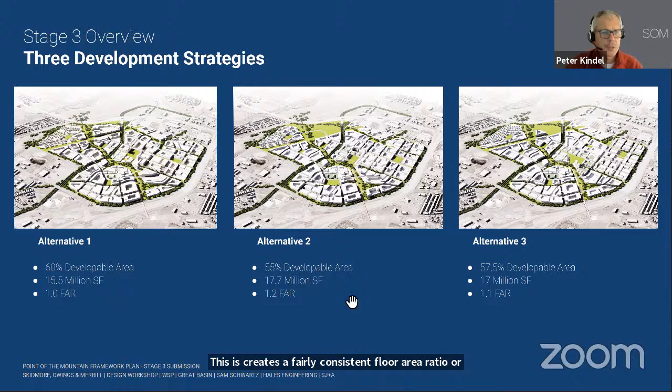The main driver of that difference is the community park we talked about in the Northwest. They are all relatively similar in terms of total square footage. Alternative 1 has 15.5 million, alternatives 3 and 2 have 17 million. This creates a fairly consistent floor area ratio, or FAR, meaning the perceived density of the project. But more importantly than the differences are actually the things common to all 3, so I wanted to walk you through those now.

One is this idea of uniquely Utah. We heard that from you last time. We want to make sure the project is specific to this place. We also want it to be an economic catalyst for the Wasatch Front. There was general agreement that this project should be a landmark project with higher density and higher level of aspiration than typical projects.

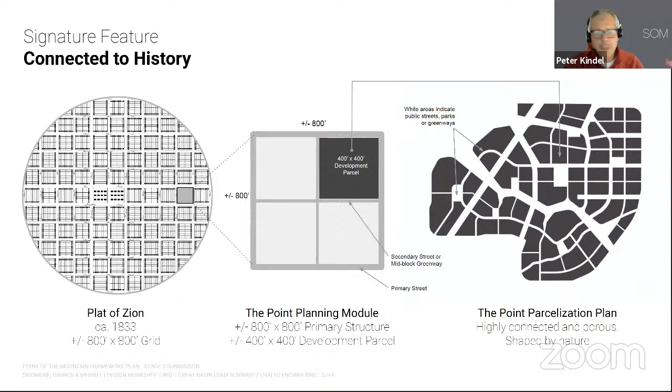There's also a comment about the road grid and why we chose the development increments or parcels that we did. It really was based on the original Salt Lake grid, shown here on the left, or at least the concept behind it, which formed an 800 by 800 foot macro structure, with the development parcels contained within that. So there's a correlation with this idea of being uniquely Utah, between the physical layout of the plan and Salt Lake history. We think that's important, and it also establishes porosity and movement through the project.

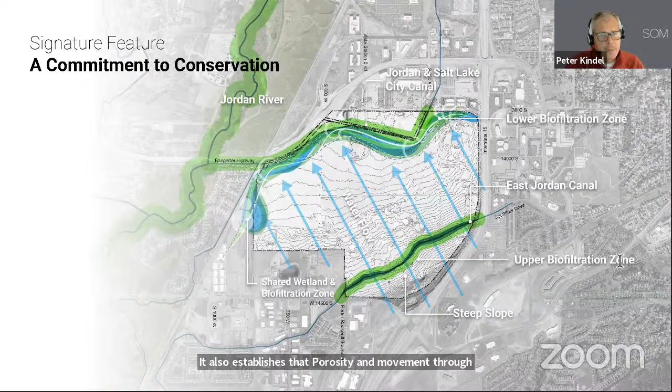A commitment to conservation, water management and incorporation of wetlands. Of course, the river to range trail, which we've talked about before, this idea of connecting these two major physical features in the valley, the river and the range.

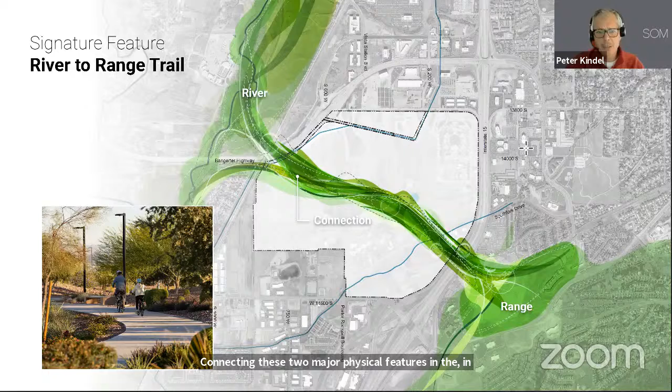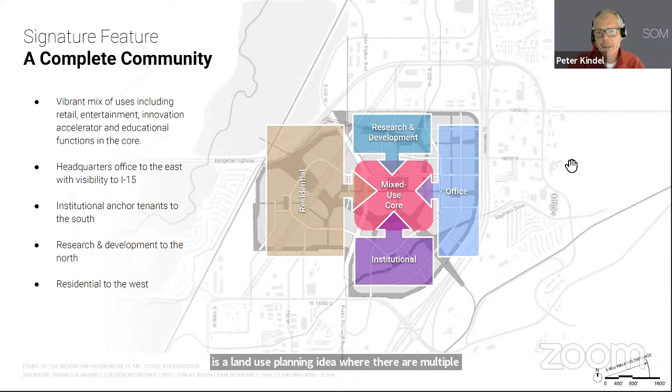What we're calling a complete community, which is a land use planning idea where multiple activities interact around a central core. That is structured around the notion of a 15-minute city, so everything is within a 15-minute walk of the center. At its core, this project innovates in the sense of being primarily a bike and pedestrian community, and cars become complementary to that idea.

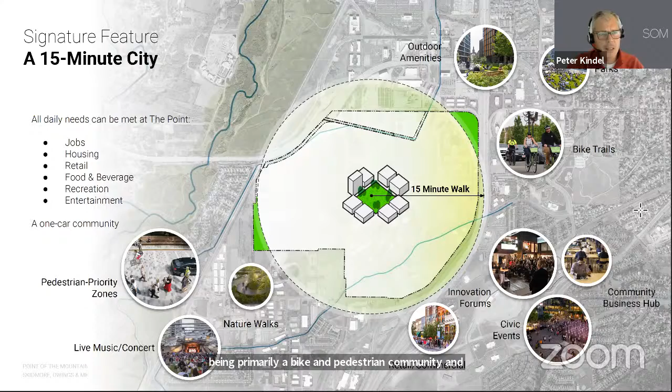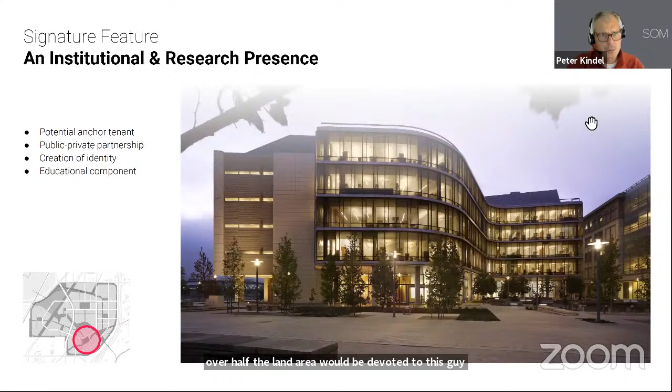A series of 5-minute districts. All of the schemes have this subdivision of districts, and then some program elements. This signature feature of a business and technology hub—over half the land area would be devoted to this commercial goal, an institutional and research presence, and a live-work community where there is a balance of housing and jobs in proportion to each other.

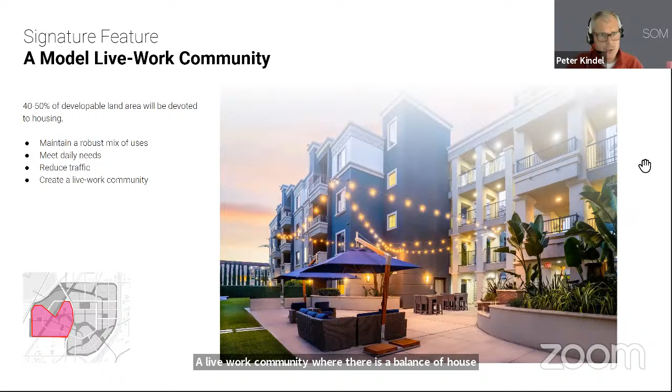Gold standard bus rapid transit. As I mentioned, we have been working with UTA to refine the BRT route to get that maximized around density and jobs. We've also been talking with UTA about a very innovative circulator in the plan.

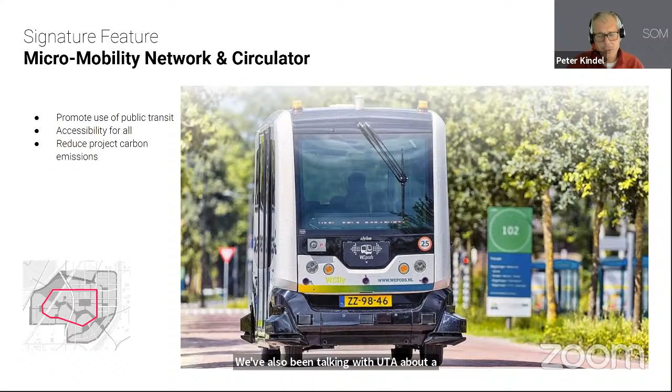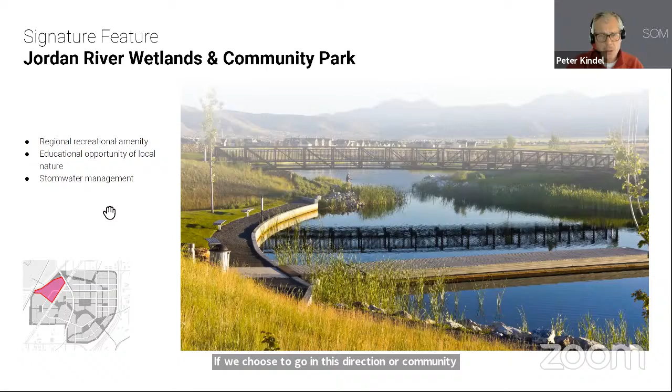Again, this is common to all the plans: a retail and entertainment destination, which would be part of the core area. If we choose to go in this direction, a community park at the northwest, a central park, which we've heard about before, and then pedestrian priority zones.

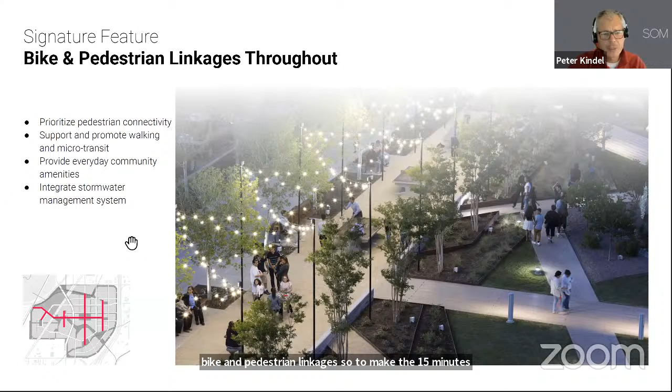Bike and pedestrian linkages. So to make the 15-minute city idea work, this idea of a complete community, strengthening and reinforcing these bike and pedestrian links.

And then finally, a community for everyone. So it's a place where families can live, where young people can get their first job, where communities can come and be part of a full and complete community, as exemplified by these smaller amenities and parks distributed through the project to add to that livability.

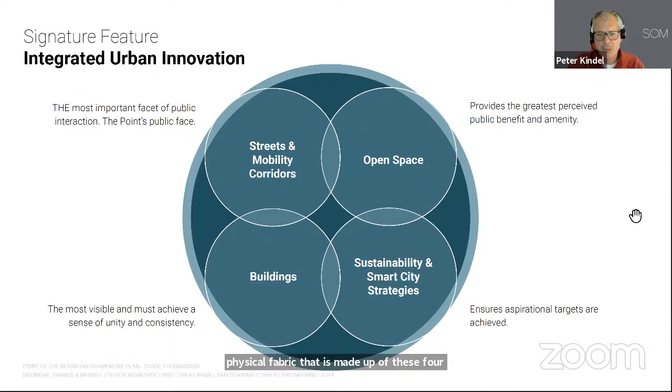And this will all come together in a highly innovative physical fabric made up of four components: streets and mobility corridors, open space, buildings, and our sustainability and smart city strategies. So those are the common elements.

Now I wanted to quickly walk you through the actual alternatives. This is alternative 1, with 60% developable area. Here's the framework plan you've seen before. The gray represents development area, the green is open space, and the white are roads. You can see the pink or dark red line is the BRT route.

We tried to bring that BRT route right into the core area, but in this particular option it actually skirts the edge of the core area. There would be two stations as shown by the white dots, and the dotted red line indicates a potential pedestrian priority zone. It's pretty substantial in this option, essentially defined by that loop road.

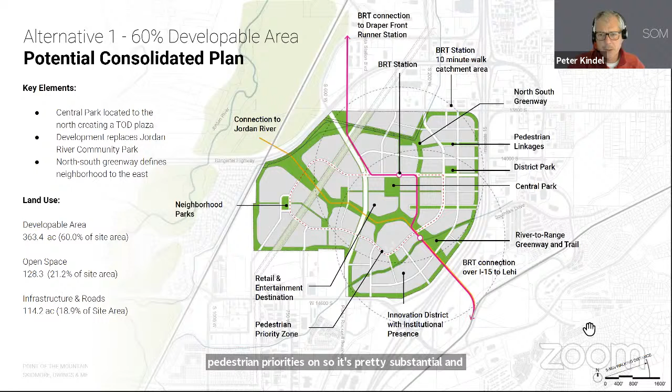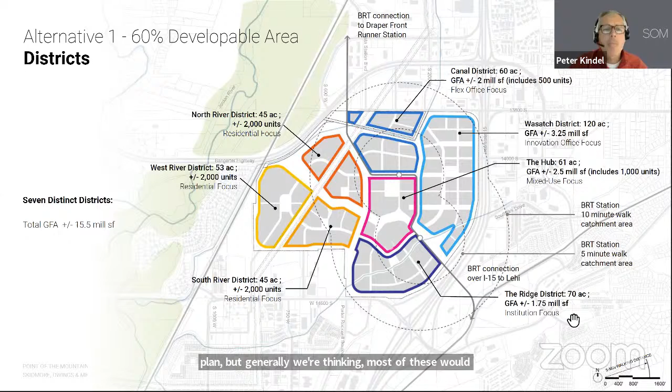The district concept is shown here. These districts range from 45 acres up to 120 acres. They would have different focuses depending on where they sit in the plan, but generally we're thinking most of these would be mixed use in some way. The retail and district cores are indicated here—you can see a concentration of retail and other active functions that would serve as a balance for the residential and office, focused around the BRT.

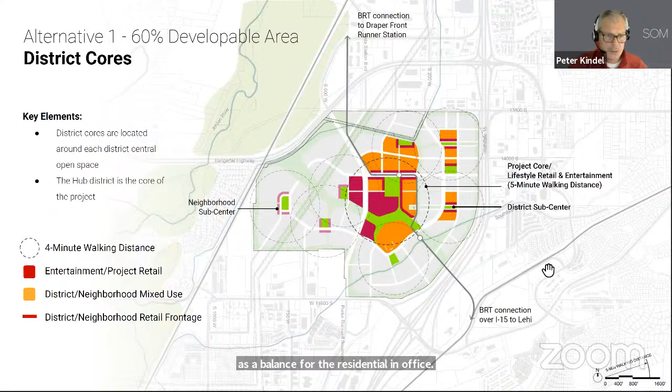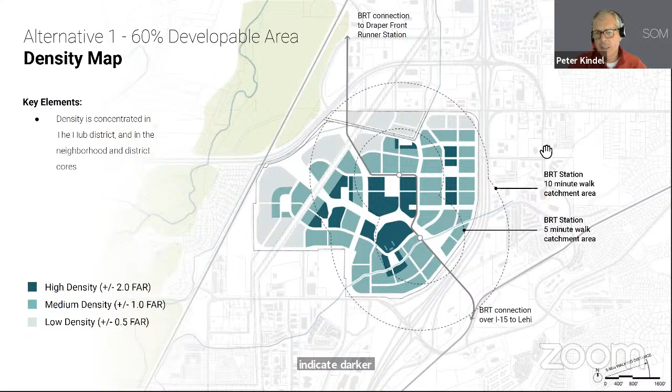So a high degree of accessibility from public transit to this core area. And then the density map shown here: darker colors indicate higher densities, again trying to maximize that density around BRT and public transit.

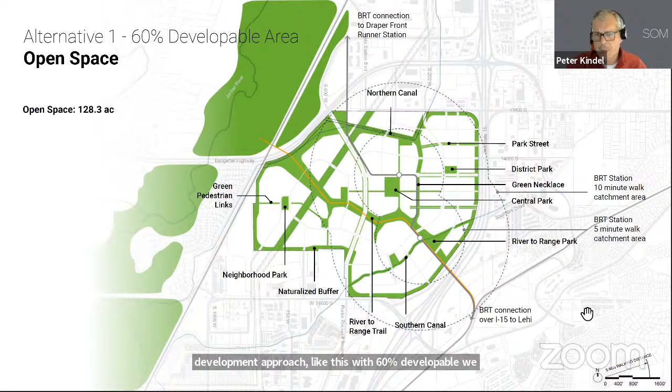The open space plan in option 1 indicates about 128 acres of open space. You can see the community park in the northwest is not included in this plan. What this means is if we move forward with a development approach like this with 60% developable, we would lose some of those sports fields, essentially, so people would have to go elsewhere to get that recreation component.

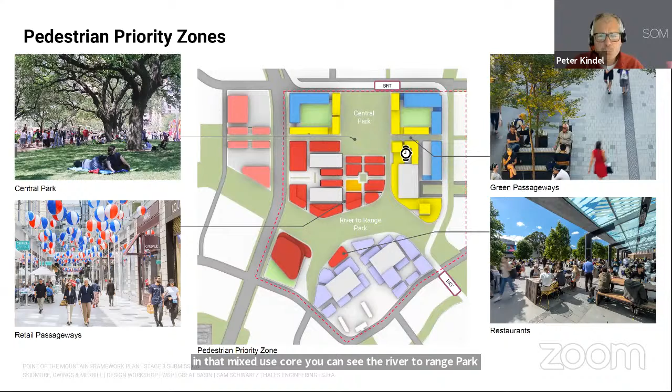As I mentioned, we've spent some time working on the core areas. This gives you a sense of the pedestrian priority zone in that mixed use core. You can see the River to Range Park and the Central Park. We're also looking at a variety of micromobility and transit options.

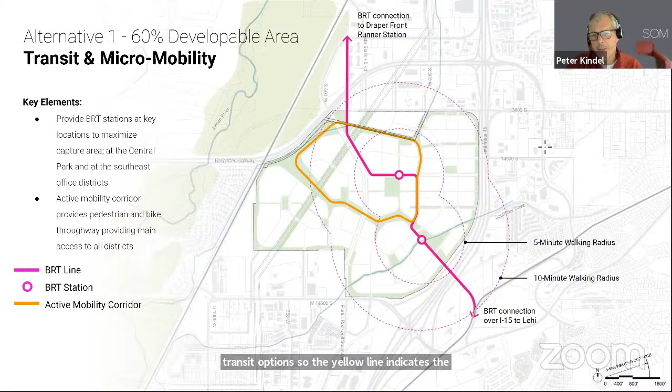The yellow line indicates a potential micromobility or circulator route. We're in discussions about whether that should be a separated route running in its own right-of-way, or whether it's integrated with streets. We hope to refine that in stage 4.

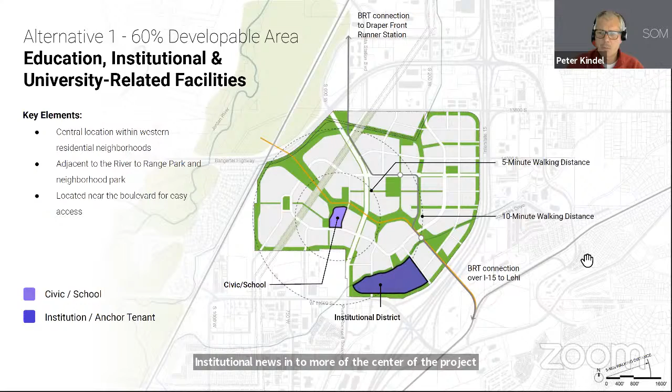This shows the civic and institutional presence in the plan. This is still very much in progress. As I mentioned, the developers encouraged us to move that institutional use into more of the center of the project, so it activates the adjacent land uses.

Alternative 2 is 55% developable. The difference is that community park is now back in the plan. I want to emphasize that we can still meet the development targets and GFA targets we've established, even with that park. The other difference is that the central park, at the center of the plan, has been joined up with the River to Range Trail, so that central park location changed a little bit.

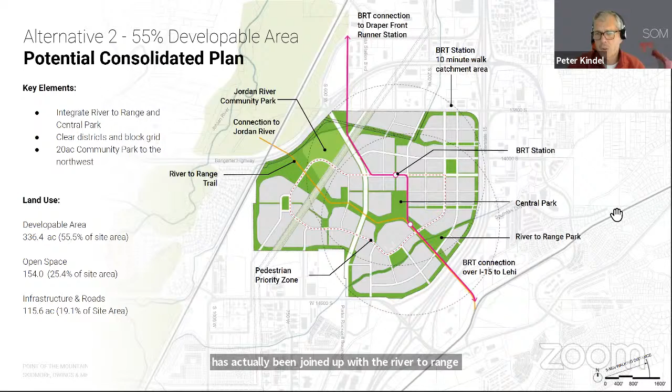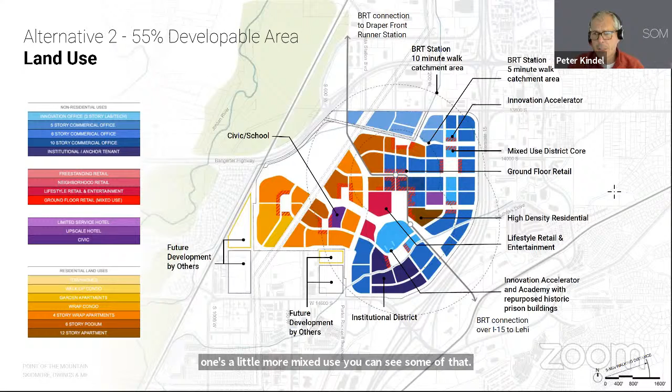I'll go a little faster. The basic concepts are similar between the 3 schemes. This one's a little more mixed use—you can see some of that residential migrating eastward into the office district. Based on developer feedback, we anticipate that will be a little bit more developed in stage 4.

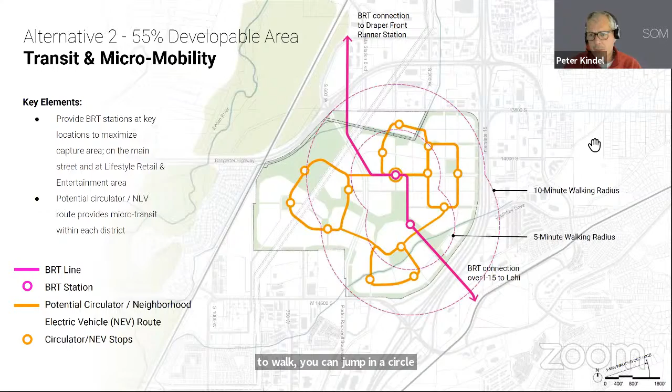Again, similar road network, but this one has a different transit idea. We're also exploring multiple smaller loops that connect to districts and link people back to the BRT stations, so for people who can't walk or choose not to, you can jump in a circulator and get to BRT or wherever you need to go in the plan.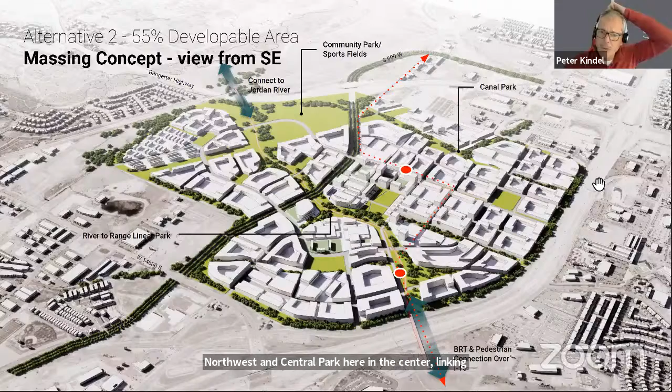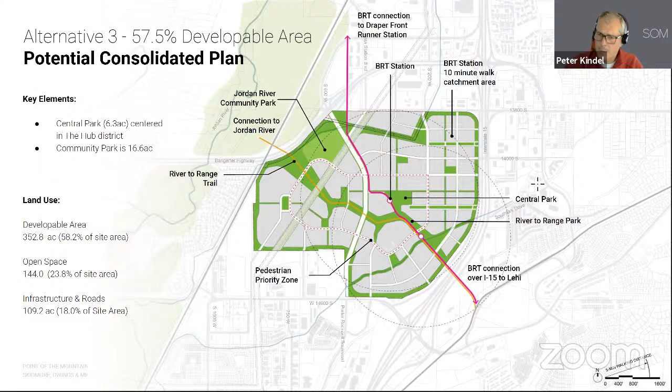But again, we can meet the development goals without any issue on all 3 options, so it's really a question of which is the preferred park system. This one also demonstrates a fairly high degree of mixing of uses, probably the most of all 3—you can see about 6 or 8 parcels in the core area converted to residential, which is in line with what the development community, and some of you, have asked for.

Again, the idea of a slightly more mixed use, dispersed retail model, but still a commitment to that core area with the core retail right there in the middle.

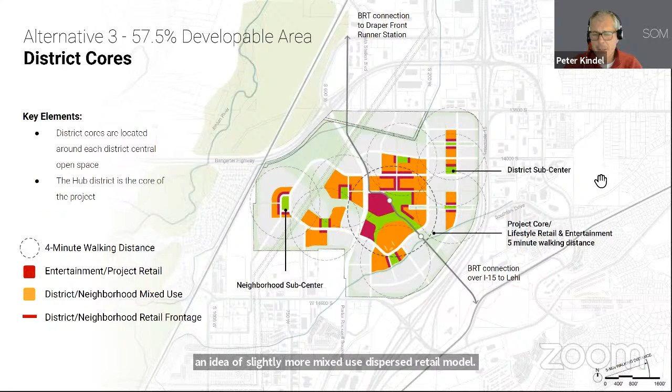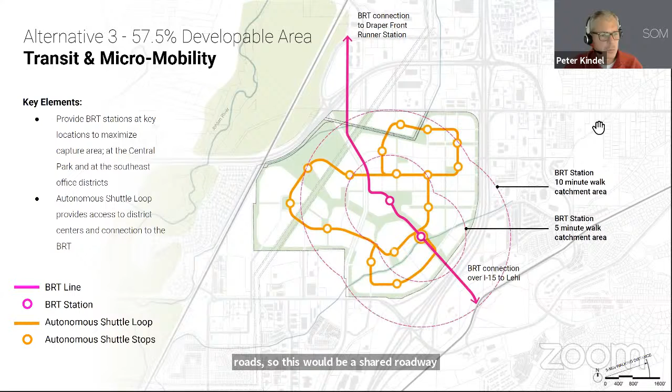In terms of transit and micromobility, again, a loop system would run on existing or planned roads. This would be a shared roadway idea where the mobility vehicle would run on a shared street.

And then I just wanted to touch on a few studies we did on the core area as well as the open space. I'll take about 5 more minutes, Alan, if you don't mind.

The open space planning has also been advanced in stage 3. This shows a diagram of the types of open space that we're thinking of. You can see the signature open space, of course, is the River to Range Park.

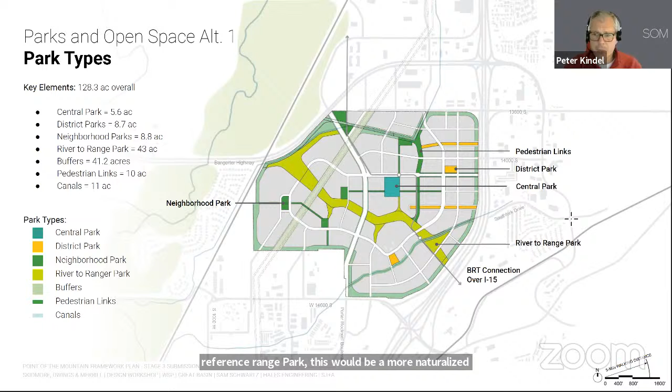This would be a more naturalized environment, but could also take certain programming. So you could have some informal soccer fields there, and other types of active recreational uses there.

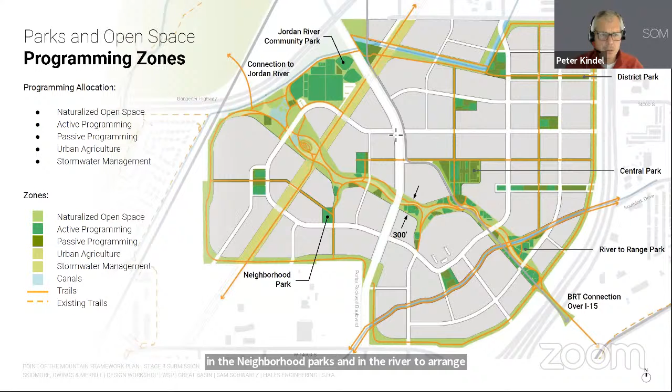This drawing shows in the brightest green color what we call active programming—sports fields, volleyball courts, basketball courts, baseball fields. You can see that predominantly that's focused in this community park to the northwest, but there's also room in the neighborhood parks and in the River to Range Park for certain activities like that. So we can accommodate many activities in these other spaces.

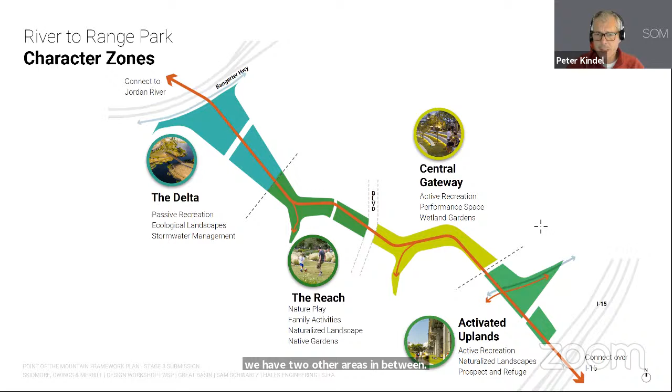In terms of the programming of the River to Range Park, we've divided it into 4 segments: the delta or low end towards the Jordan River, the activated uplands or high end towards I-15, and two other areas in between. Each of these can be programmed in different ways. I think that's what's really exciting about this park—it not only touches the entire project, but can serve many, many functions.

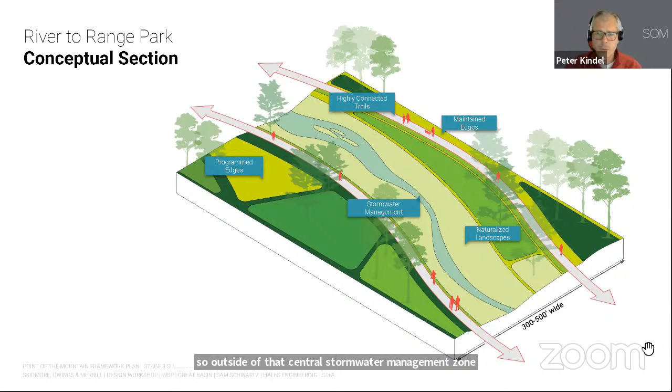One of those primary functions is to move and convey stormwater through the project. This will save money on below-grade infrastructure. It also creates potential for naturalized habitat recreation, but it also allows what we call programmed edges—so outside of that central stormwater management zone, there could be active spaces for children's play areas and events like that. We've begun to do some very informal programming of how this might work.

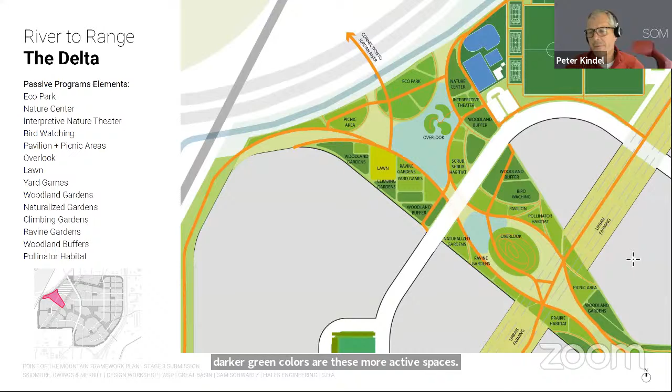You can see the orange lines are pathways, and the darker green colors are these more active spaces. This gives you a sense of the types of activities that could occur in there, and then just a few images of what things might look like.

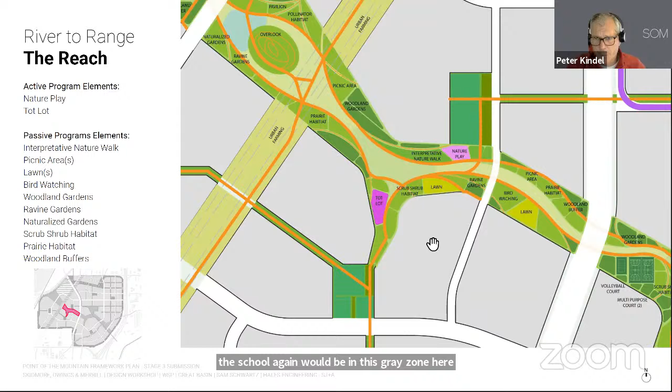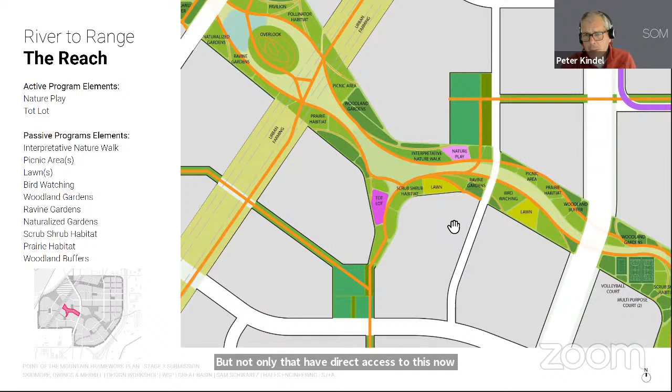As you move more to the center of the project, the school again would be in this gray zone here—that's the school parcel. You can see that kids could get right on these orange pathways and walk wherever they needed to go. But not only that, have direct access to this natural system and play areas that would be, I think, really complementary to that school function.

We want the landscape to reflect Utah, to reflect the ecosystems and plant communities that are native to this part of the valley. That'll be consistent throughout the whole park.

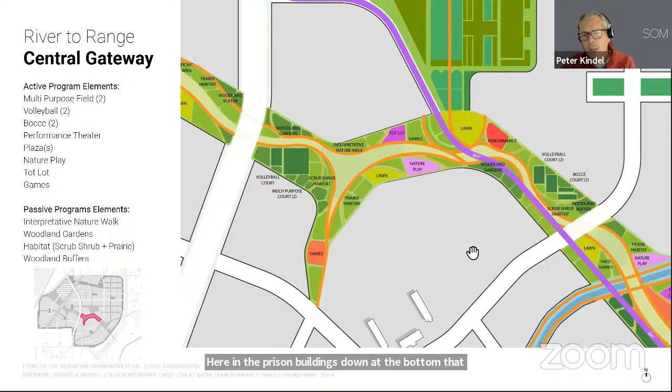As you move more to the middle, this is again that core area, that mixed use core. Here are the prison buildings down at the bottom, the 3 historic prison buildings. You can see some of the programming ideas in this central area.

And then finally at the top, adjacent to I-15, this could be a more programmed area, maybe a little less natural because of the proximity to the highway and some of those influences, but could be very well suited to maybe a more active program.

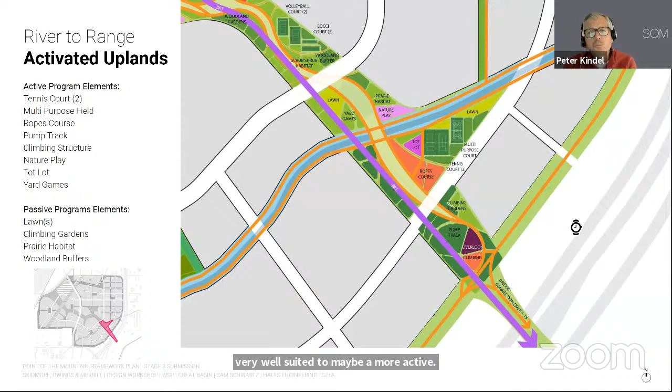So those are the 3 alternatives with a little bit of an overview to the open space. And Ellen, I'm happy to leave it there.

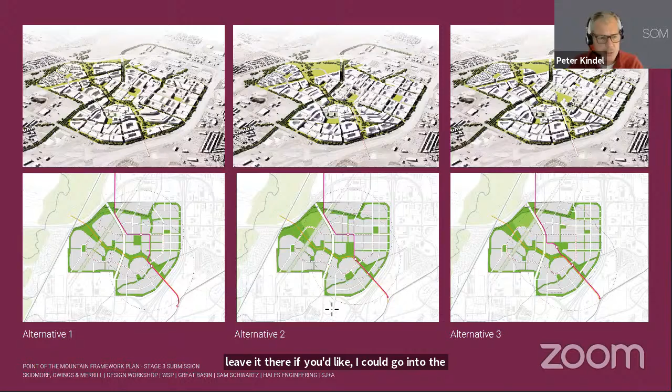If you'd like, I could go into the detailed planning for the core area if you'd like to spend another 5 minutes. Yeah, let's just touch on that quickly. Okay, Pete—yeah, I think it's, we want to get to discussion, but I think that's an important piece for people to understand. Right.

One of the really important parts of the project is the core area. This is not only the geographic center of the site, but the spiritual center of the project. This is the most mixed use, the highest density. It's where the River to Range Park meets the Central Park, and where the retail will be. Really important spot in the plan.

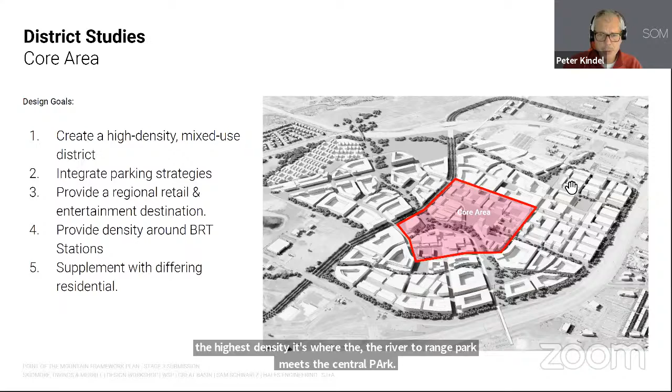So we've actually done three versions of this. The first one is a low density core. We tried to find an analog. This is Kierland Commons in Scottsdale, to give you a sense of the height of the buildings and the types of functions that might be here.

Probably most of you have been to a place like this. These are pretty active mixed use environments. Some of them have a high housing component, some of them don't, but they're great places to meet friends, with high energy activities that will serve all the uses in this master plan.

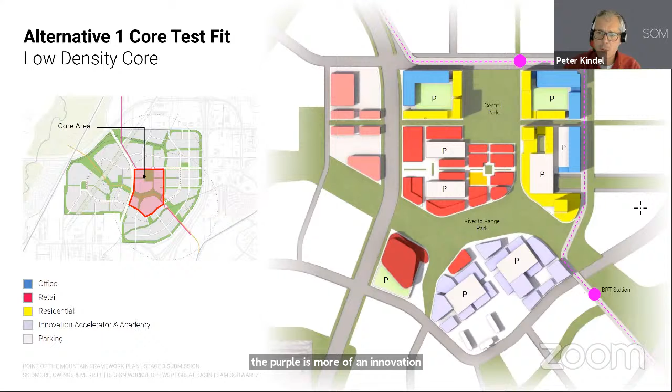So here you see an enlargement on the right of that core area. The main boulevard is this gray line that comes up the left side of this drawing. The BRT route is shown in the pink dotted line, with the two pink dots representing the stops. Yellow is residential, blue is office, and red is retail. The purple is more of an innovation R&D type function. So we see the core area being, again, highly mixed use.

This gives you a sense of the scale of the project. This is 72 acres, the parcels that are shown here. This is a 12-story building, this yellow one right here. So these are big development areas.

But I think what's really exciting is the mix of uses in this core area, the ability for it to accommodate a lot of exciting types of development, and the proximity of these different functions will really generate a lot of excitement and energy as part of the core of the project. This would be about 2.5 million square feet of development, which is shown here.

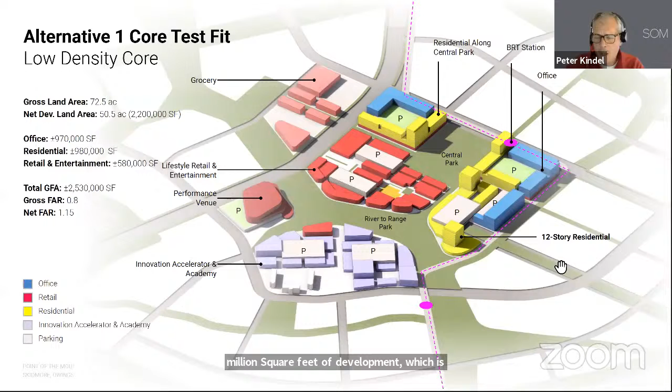We've also started some very early programming of the Central Park. These are just some very early ideas about what might be included in here, and some very simple ideas about how that might be arranged. But we want to have performance space, event lawns, some activities, some dining. You can see the BRT station at the north edge, and these green lines indicate pedestrian connections from different parts of the plan.

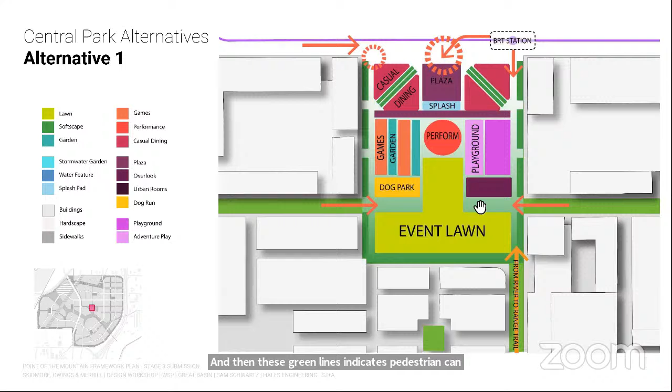Also exciting. And just as a reminder, for option one, alternative one, that Central Park is the furthest away from the River to Range. So it's actually its own distinct space, and that would touch the BRT line to the north.

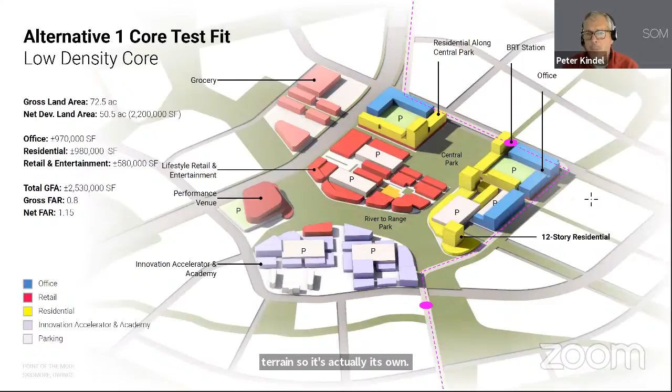Option two is what we called our high density core. The analog that we looked at is a place called Reston Town Center in Virginia. This has a very high, relatively high density, tall buildings.

Here is the plan, so this aligns with option two for the master plan. Here, the Central Park has been connected directly to the River to Range Park, so you can see that it's no longer linked to the BRT station. You would have to walk a little bit to get to that Central Park. However, there's potential benefits for being connected to River to Range for larger events, for instance, or other types of programming where there might be a lot of people.

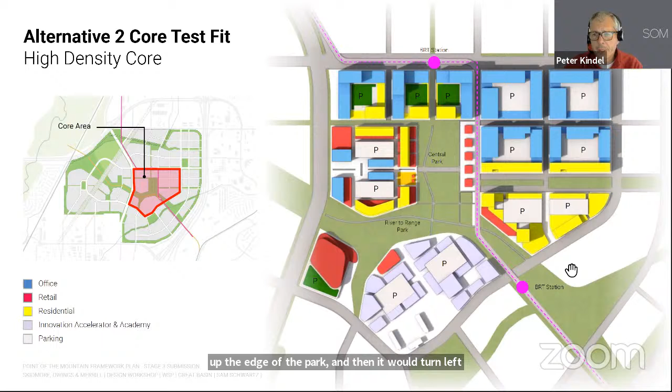So in this design option, the BRT comes in and would go up the edge of the park, and then it would turn left onto the boulevard and then exit to the north. But other than that, the land use assignments are approximately the same. Yellow represents residential, blue office, of course.

And here you can see more mixing, so you can see residential on top of red, which is retail, blue on top of red. So this is a more complex but very appropriate development model that a lot of folks are looking at today, this idea of mixing uses on a site. And you may be seeing some of this in the Salt Lake area today.

This is about 5.3 million square feet of GFA. Just for reference, that's almost a third of the total GFA of the project. So this high density model does accommodate and can absorb a lot of development. I think one of the components we're going to look at in stage four is to allow the core to respond to market demand, so the density may actually go up if the project really becomes successful.

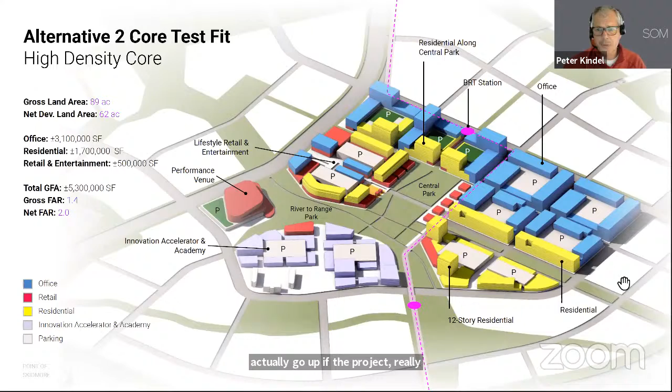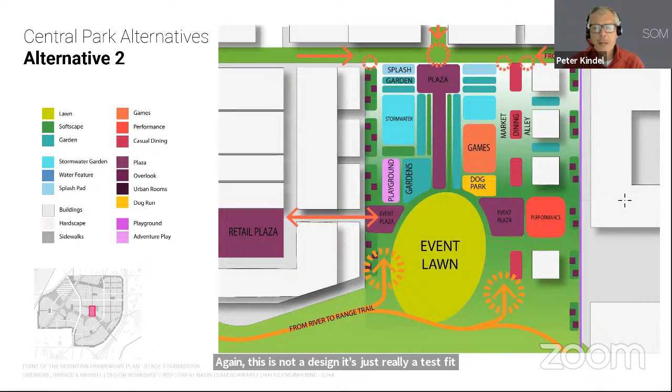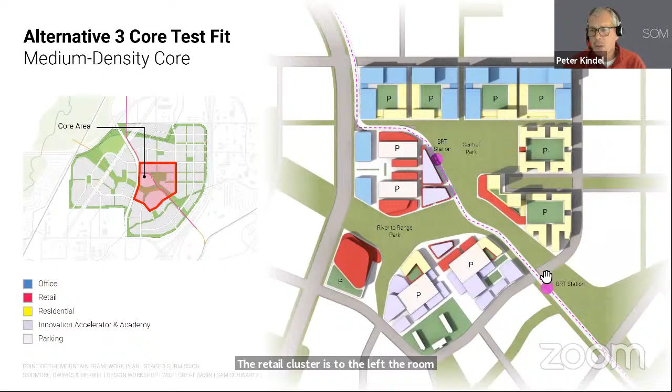In 3 dimensions, this is what that starts to look like. The BRT right-of-way is shown to the appropriate scale, about 40 feet wide. So one of the challenges would be how to make sure that the Central Park and River to Range Park are not overly impacted by that BRT route.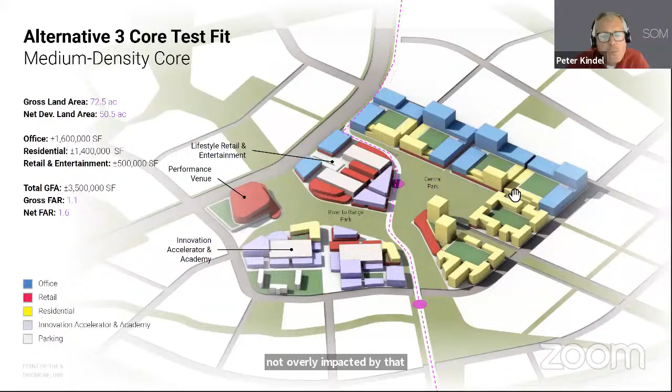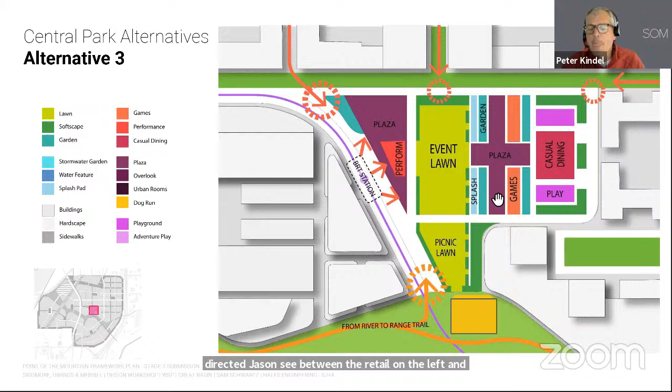This one's kind of interesting because we do have that direct adjacency between the retail on the left and the park on the right. This is probably the most unique layout of the three. So these are the three core areas.

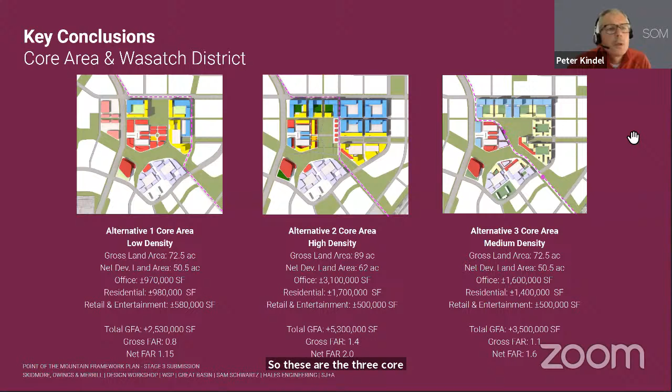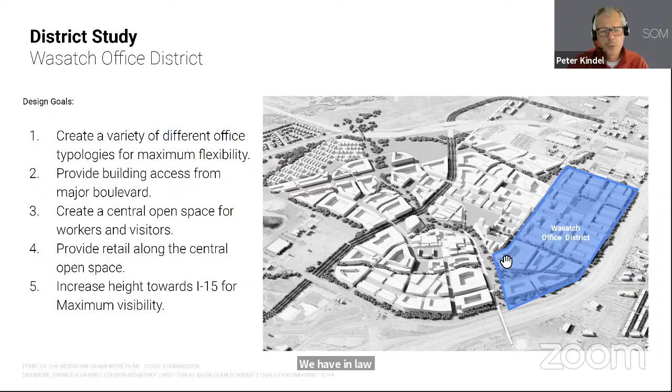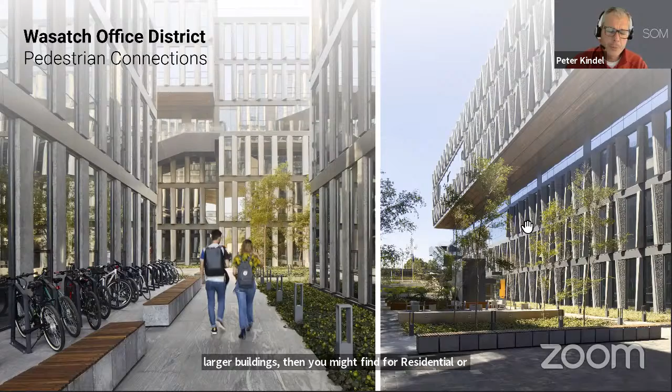One last test fit I wanted to share with you today. We are making sure that the office layouts we're showing in the framework plan actually work and accommodate real buildings and real parking structures. We've enlarged the grid a little bit in the office district because current demand for office warrants larger buildings than you might find for residential or retail areas. This gives you a sense of the scale and type of buildings that would go into these office environments.

We want a strong commitment to landscape, ground plane, and shared space, what we call active ground levels. This is the northeast quadrant of the plan. One of the challenges we had, in addition to building scale, was parking accommodation. According to current demand, the parking requirements are pretty substantial. You can see that buffer to I-15 that's part of the master plan. What we call Wasatch Park or Wasatch Square would be the central park for this area, the district park.

You may notice that we've clustered the parking structures so they are screened from the primary open spaces by buildings. So you don't see the parking structures as much as possible from the primary streets, and we can further screen those architecturally or with landscaping.

Here you see a three-dimensional model of that core area, the Wasatch Park and Wasatch Square. The smaller buildings would be research, R&D, special functions adjacent to the park. The larger blue buildings would be corporate office, and the Ps indicate parking.

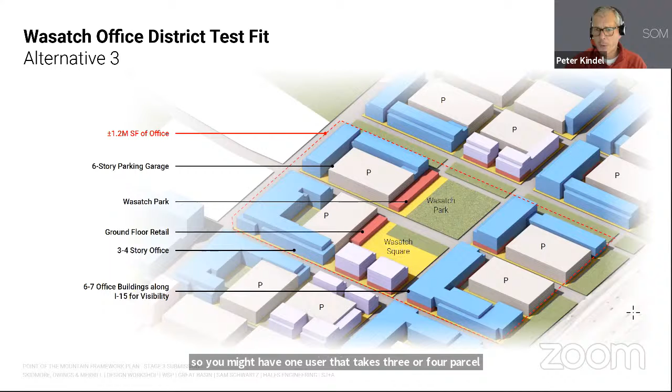The other challenge we wanted to look at was how do you aggregate parcels together. If a user comes in wanting, say, 1 million square feet of office, how would we do that? The red dotted line indicates about 1 million square feet. So you might have one user that takes 3 or 4 parcels, but we would require them to design the project in a way that's consistent with the principles you see here, this idea of public space, screening, parking.

Here's a view from a little further out. You can see the South BRT station to the left. A 5-minute walk is in the first dotted line, and a 10-minute walk is in the second dotted line. So even from the South BRT station, about 2/3 of this district would be within a 10-minute walk of BRT. That's fantastic.

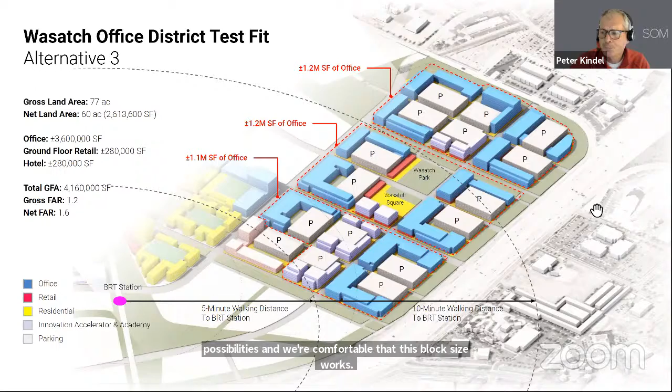We've indicated 3 potential campus groupings of buildings, each around 1 million square feet. So lots of possibilities, and we're comfortable that this block size works for this parcel. I think I'll leave it there, Ellen, and open it up to any questions.

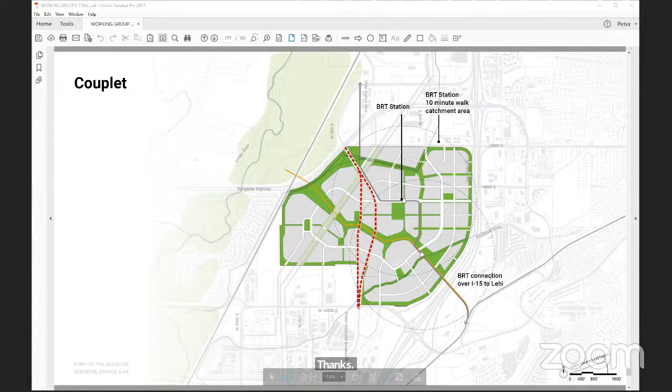So you've identified a number of things that are important and still very much under consideration. So thanks. Thank you. And Pete, did you want to add anything to that quickly, or did we cover it? Yeah, I think, Reed, thank you.

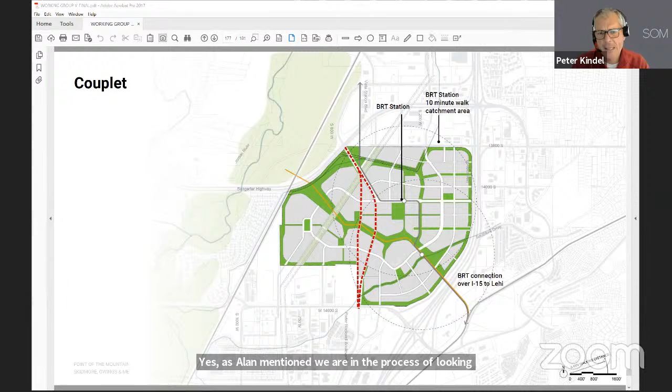Yes, as Alan mentioned, we are in the process of looking at the couplet. This was our first pass at it, and we have communicated some advantages and disadvantages of it to a client group, to Alan and Steve. So that is underway, and I think we'll be able to make a decision on it probably in the next couple of weeks. We're going to do a little more detailed design to really understand the impacts.

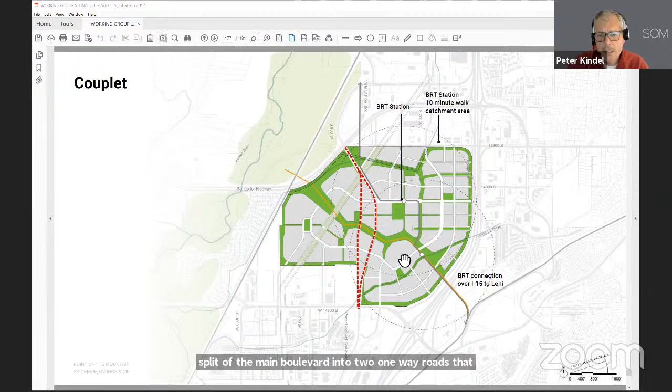And just for everyone's information, this represents a split of the main boulevard into two one-way roads that would be a little bit smaller in scale. And the idea there is to reduce the potential barrier that a larger boulevard may create between the two sides of the plan.

If I could just jump in, Reed, we were just looking at this yesterday and looking at analogs around the country, including at Daybreak, which has one of the better implementations of the couplet. So the main thing is to minimize the amount of inefficiency that's created by the taper. I think we'll probably be relooking at this geometry and seeing if we can get it more efficient, and see what the width needs to be between the two sides. But the whole idea is to break down the scale of the street so it's a little bit more pedestrian friendly.

I'd also add that we're working on this phase 1 programming right now, and we're definitely recommending single family detached, so higher density single family detached, but still detached nonetheless in the first phase.

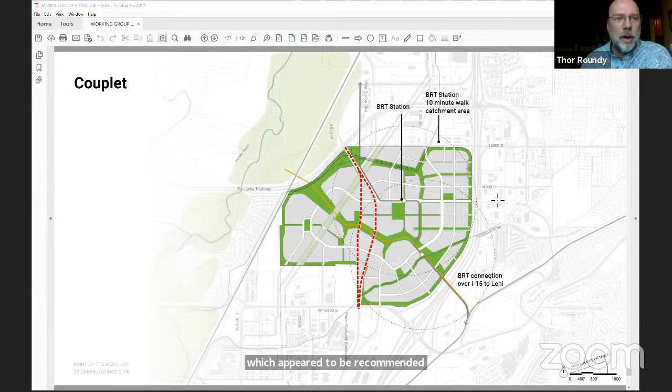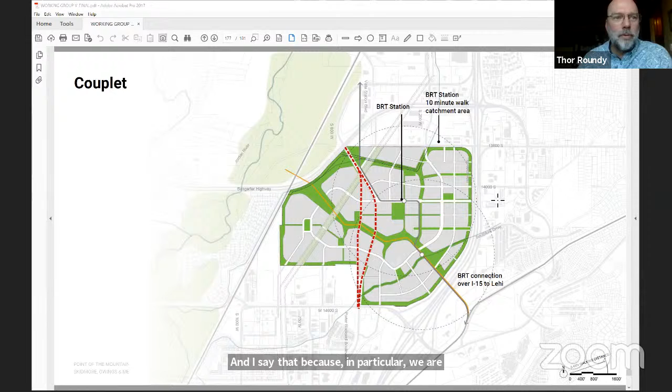And one of the things I didn't see in all three scenarios was that mix of residential into each of the districts, which appeared to be recommended by the developers. And then the one other point I want to make sure we highlight is that we should also be taking into consideration the regional role that this location is going to serve. And I say that because, in particular, we are anticipating a significant amount of funding for infrastructure coming from the federal government.

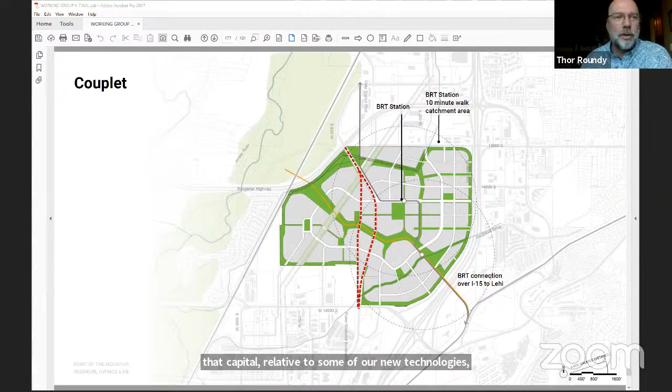And I know that within the state, there have already been some conversations about how to deploy that capital relative to some of our new technologies, those related to electrification for transportation infrastructure. I won't dive into the particulars of what we should be anticipating as far as additional transit options and connectivity to the region might go. But I think those transportation issues and how we connect to the surrounding area is also going to have significant impact on some of the decision-making on the issues we're discussing in this meeting.

Yeah, those are great points. As I said, we've heard loud and clear about more mixing of the uses, more residential into the office, and you'll see that in the next round. And no question that regional infrastructure is key. We've had some good conversations with the legislature about how some of the funding could be used to create solutions to some of the regional challenges.

I think you're right on. In fact, I participated in a meeting this morning with the Point of the Mountain Development Commission looking at the broader transportation infrastructure needs and how they might be able to help advance that. So thank you, wonderful points all.

Really good questions. Okay, so for about the next 40, 45 minutes, we have an opportunity to jump into these breakout rooms and have a little more robust discussion. We've got 4 rooms and you'll be able to access them on our Zoom at the bottom there. One is on transportation, one is on environment and air quality, the third is land use and economic development, and the fourth is public and stakeholder feedback.